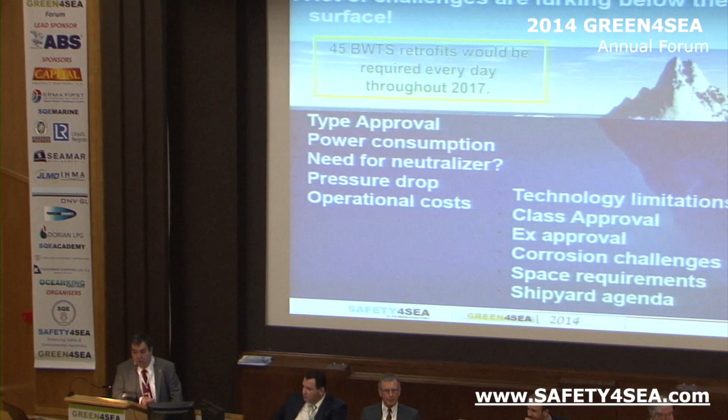But a lot of challenges will be confronted in the process. What is critical is what lies below the iceberg, below the surface.

Putting the days and the ships one by one, by simple math, we can find out that had the convention been validated tomorrow, we would need to do 40 to 50 retrofits every day from tomorrow till the end of 2017. Having that number in mind, it seems to me that we should not overemphasize the selection process.

It appears that we might have a maker's selling bonanza, or a first come, first served event.

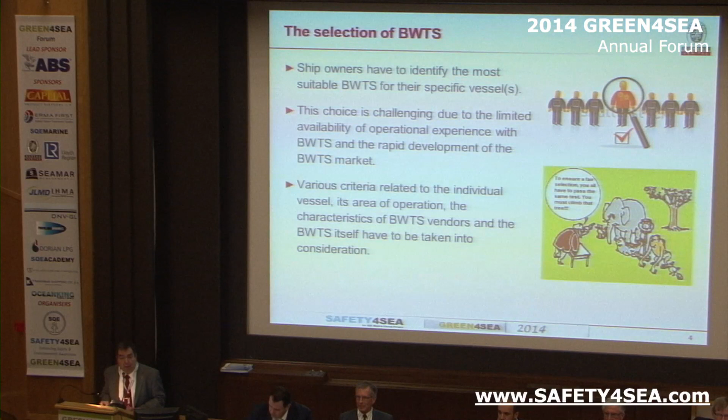Unfortunately, we do not have feedback from ballast water treatment systems. It seems that we are dealing, unfortunately, with a case of public pressure putting the regulations ahead of technology.

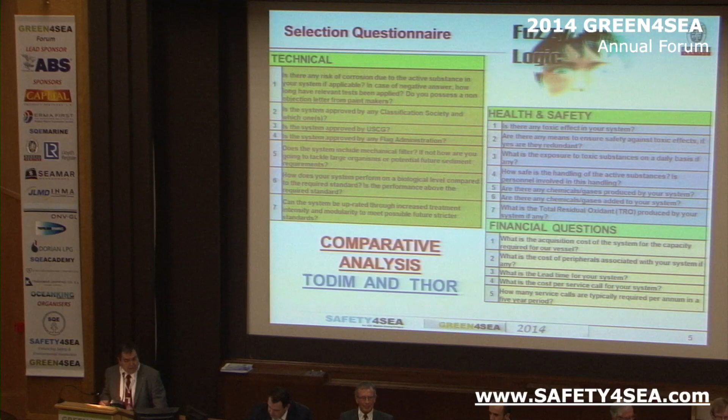We can apply advanced selection techniques like fuzzy logic or multi-criteria decision analysis, or even simpler statistical grading of a series of questions which can be grouped related to technical, health and safety considerations, financial, operation, installation and maintenance considerations. But the $1 million question is, are we going to have the time to go through this grading and selection process?

The installation questions we have are where to place the system, how to integrate it with the remaining machinery, and what to do.

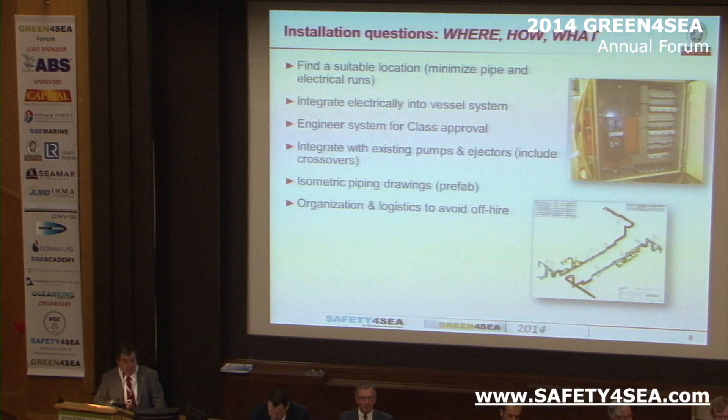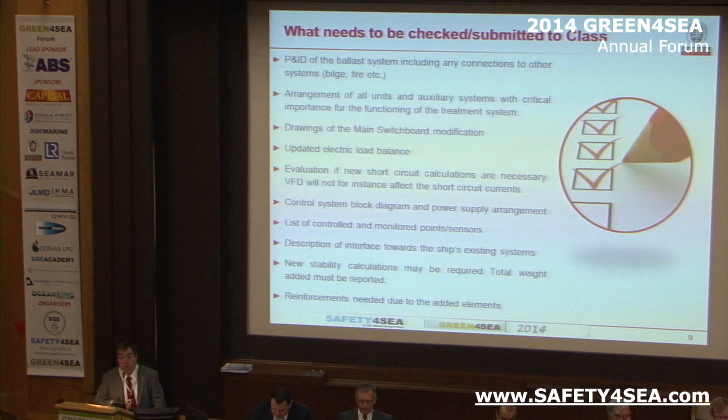Well, we have to forget the 3 to 4 weeks typical approval time from class. This is going to be a much more involved process. Remember that we are going to have to submit not only the usual piping drawings, but also structural, electrical, and control automation drawings.

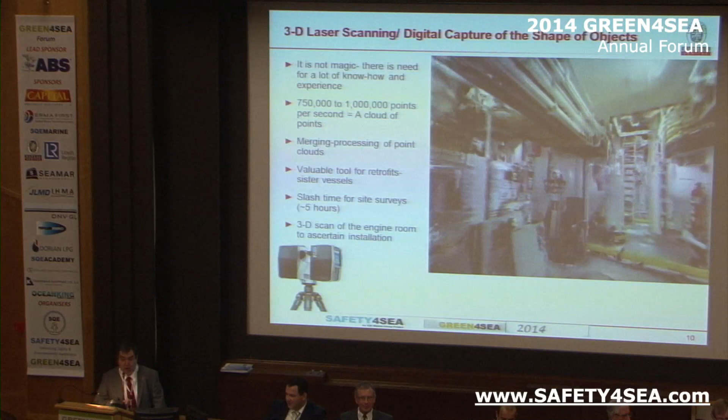We might employ 3D laser scanning technique in order to curtail the time needed, instead of the usual survey and hand metrics.

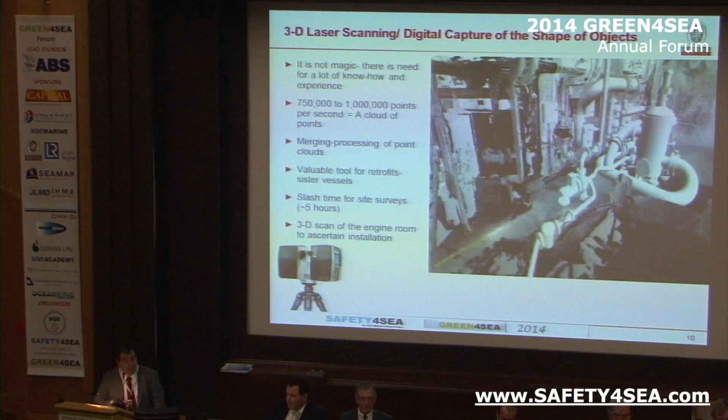Utilizing laser beams which sample at a pace of 1 million points per second, we can have significant savings in time, half a day survey. We might create point clouds on which we can superimpose the system to be constructed.

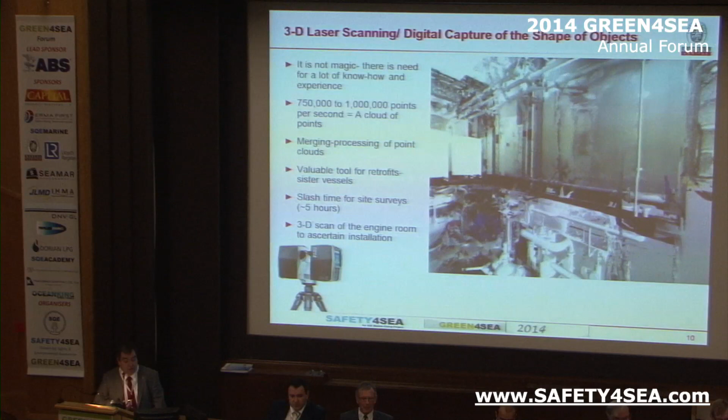Of course, the whole process from A to Z can last anywhere from 9 to 18 months until commissioning. Depends on availability of resources and experience. Remember that having a fleet, you might strike a bargain with the makers.

Another question you have to ask is, what will happen to me, what will happen to my trade prospects if we do not install a ballast water treatment system in a specific vessel?

Well, allow me to show the inevitable differential equation that shows that the effectiveness of a ballast treatment system is an exponential function of the concentration of the killing agent and the time of exposure.

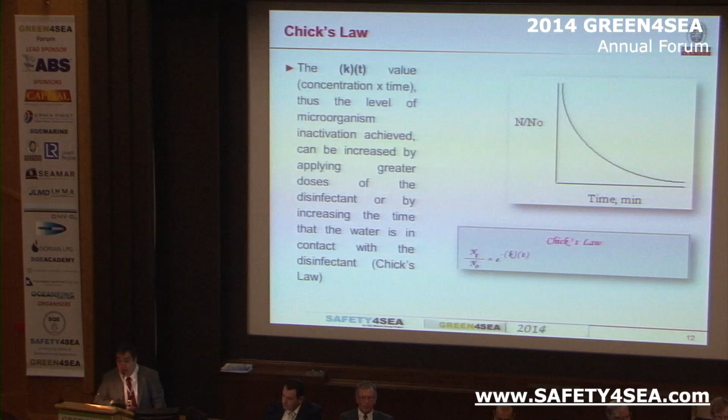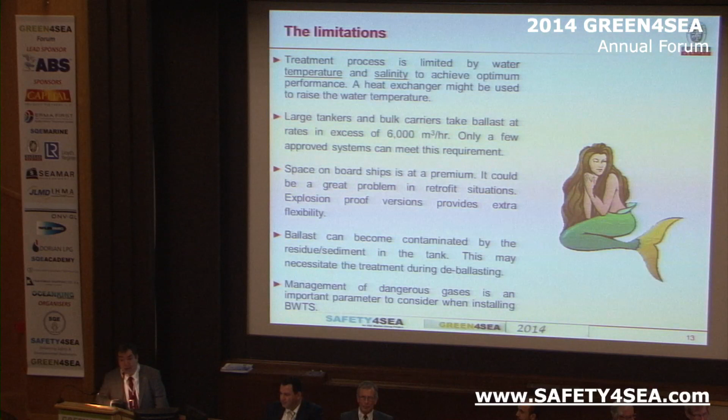Somebody has to know the limits of the system, has to know how the effectiveness of the ballast water treatment system is affected by temperature and salinity, by the size of the installation, how many cubic meters per hour we can treat, space available, if we have to take care of post-treatment contamination and do the treatment during deballasting, as well as management of dangerous gases produced during the treatment process, and the availability of explosion-proof versions, which might be necessary.

We need to do a hydraulic analysis in order to determine if there is a need for boosting, for booster pumps.

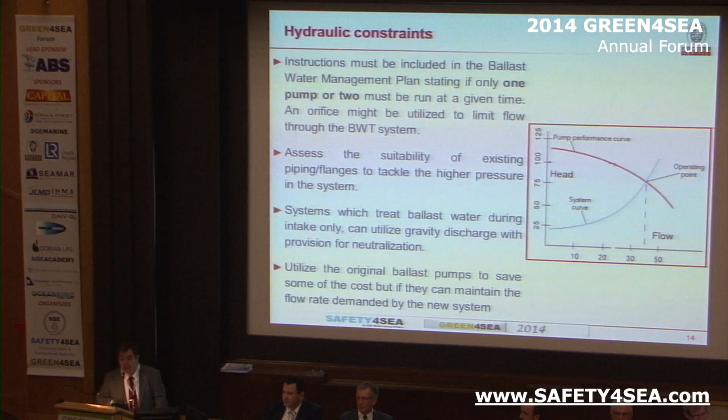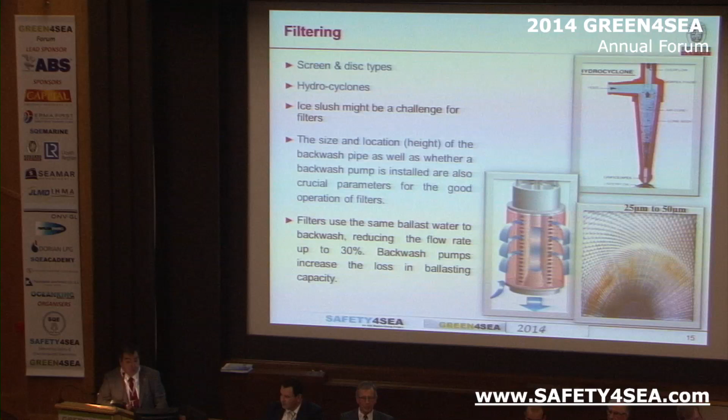An important element of the system is the filter, which can be mechanical type, screen or disc types, or hydraulic like hydrocyclones. A lot of times we have to resort to back-flushing or back-washing in order to reduce the pressure drop through the system. But remember that when you do back-washing, you reduce your ballast flow rate.

What we have to avoid in filters is clogging, corrosion, mechanical failures, lack of spares, and of course, remember, potential for water hammer because of sudden blockage of the flow area.

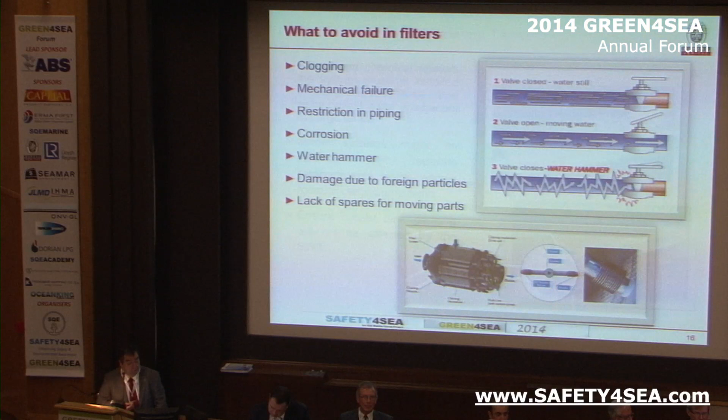The installation in tankers can be a problem, can be a challenge. Why is that? Because if the system is not installed in a hazardous area like the pump room, then it becomes the link that will connect a safe area with a hazardous area.

As a golden rule, everything that is installed in a hazardous area must be explosion-proof and must be categorized, must follow the apparatus and the temperature group standards.

It is nice and convenient to install the system in the engine room. This can be done provided that we send the ballast water to the open deck, and then from the open deck we penetrate the ballast tanks.

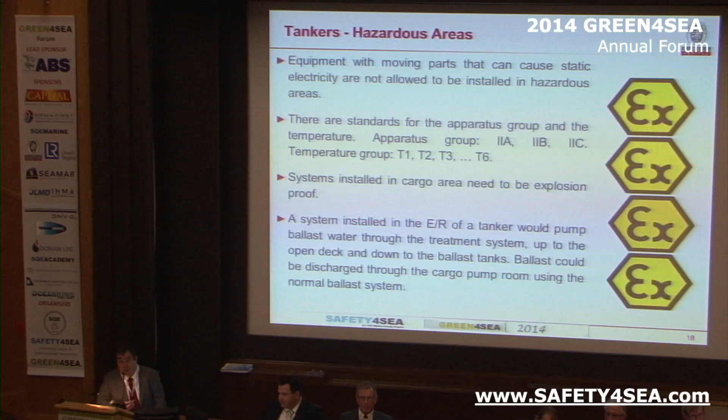We need everything that is installed in a hazardous area to become intrinsically safe, explosion-proof. This is not necessary for something that is installed in the engine room.

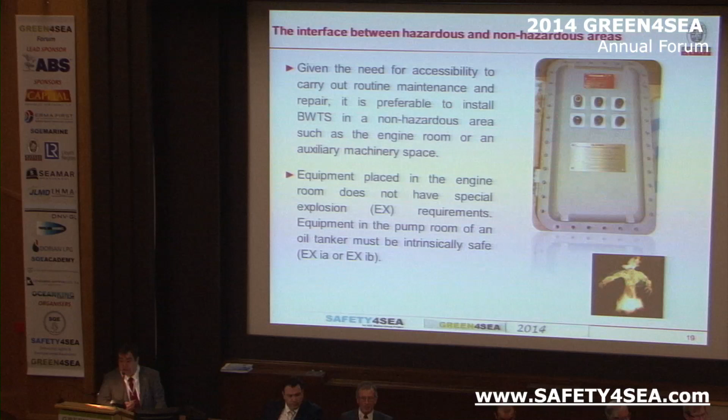For example, one of the solutions is to install the treatment system on deck. But if we install it on deck, because of the head from the pump to the deck, we need to be careful of the possibility of having a vacuum. We may need to install a vacuum breaker.

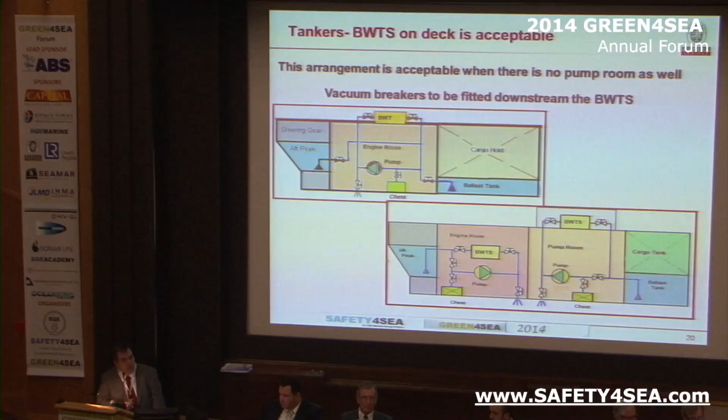The after-peak tank is a safe area. The problem with the after-peak is solved either by the draconian solution of having a second system for the after-peak, or by going the usual recipe: open deck, and then through non-return valves, go to the ballast tank.

Another solution, notice that the pump is in a safe area, can be to connect the after-peak tank with a spectacle flange.

Also, we can go from the safe storage area in the engine room to the ballast pipe to put various chemicals, provided that we follow a quartet of safety measures: reverse flow sensor, fail-safe control valve, a loop seal, and a check valve.

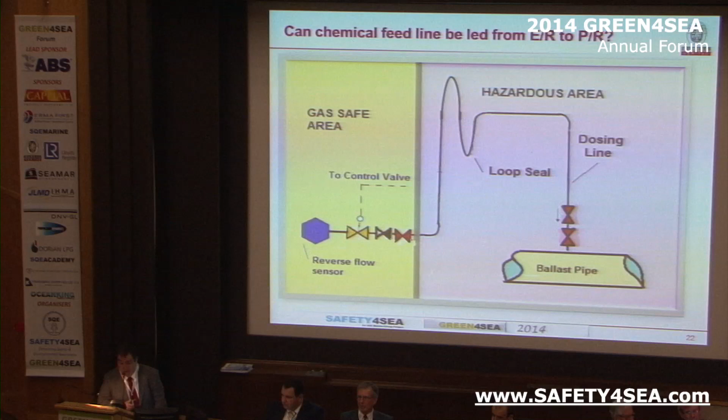Another challenge is sampling, as all of us know. Sampling must be done as isokinetic sampling from an area of well-mixed flow and uniform flow. Isokinetic means that the flow velocity in the ballast pipe and the velocity in the sampling pipe are the same, are equal.

Turbulence helps the mixing of species, the mixing in the flow. So sometimes we help turbulence by putting a mesh screen upstream of the sampling pipe, whose diameter is about 10% of the ballast pipe diameter.

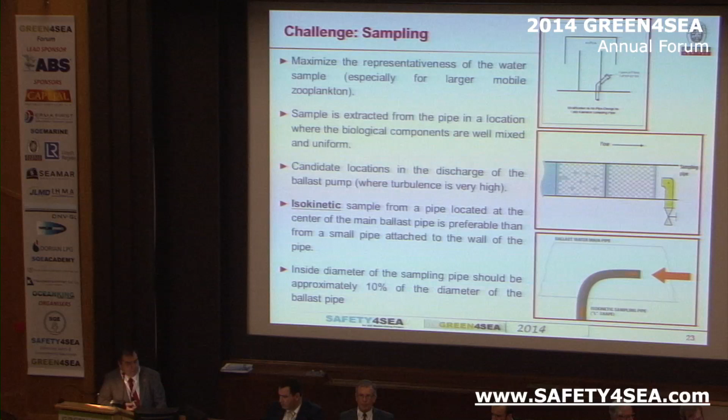Now, the problem of time for testing and sampling can be solved with what we call flow cytometry. Flow cytometry is a biophysical process of sorting and cell counting. And this biomarker, widely used, is not something new, it's used in clinical applications and biochemistry.

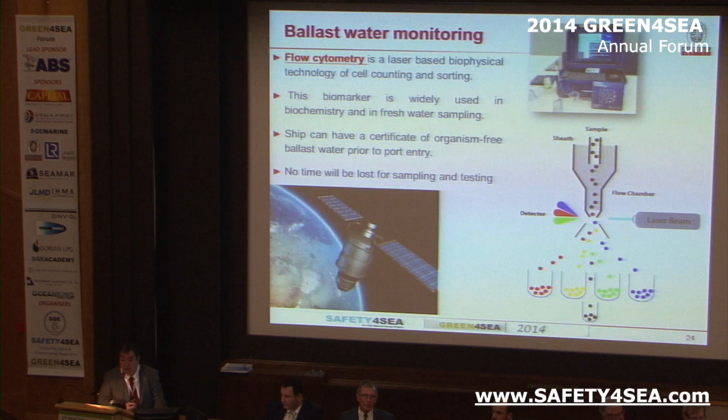It can send data automatically via satellite, and by the time the ship comes to port, it has a certificate of clean bill of health for the ballast water. It's very important, no time for sampling and testing, very critical. This is a very promising technique.

But standing in front of you today, I have two questions in my mind. What happened to corrosion protection and PSPC? What happened to the need to reduce the carbon dioxide footprint?

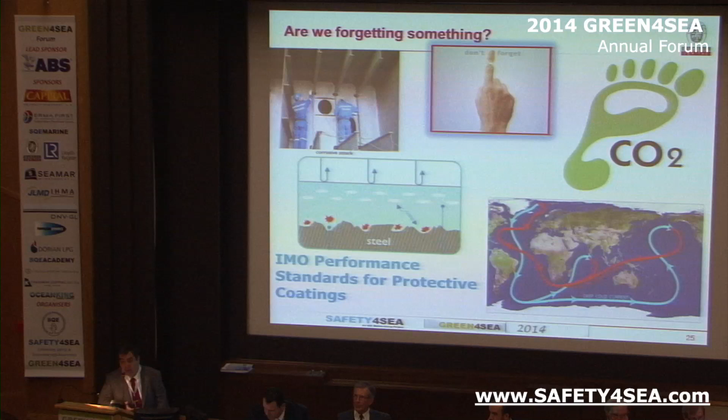It seems that maybe we have to resort, as previous speakers discussed, to the global conveyor currents, local and global. Or maybe we should apply operational measures for this problem, like doing the ballasting in the right place, the right time, if we can, because of course, remember that ballasting is connected to loading and unloading.

They are parallel operations. I hope that you will agree with me that the only thing we want to kill are these tasty Alaskan king crabs.

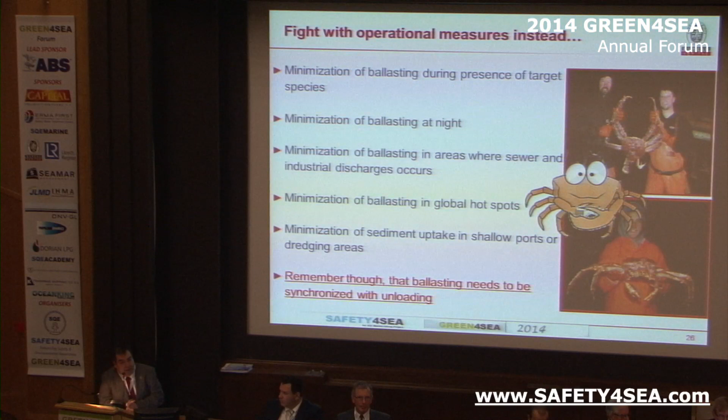Finishing, I would like to say that it is a fact of life that everybody wants to be on the high side of the boat.

Pioneers, though, or no pioneers, all of us that work in shipping, we have to remember that we are all boiling in the same pot and we are all riding the same boat. Thank you.